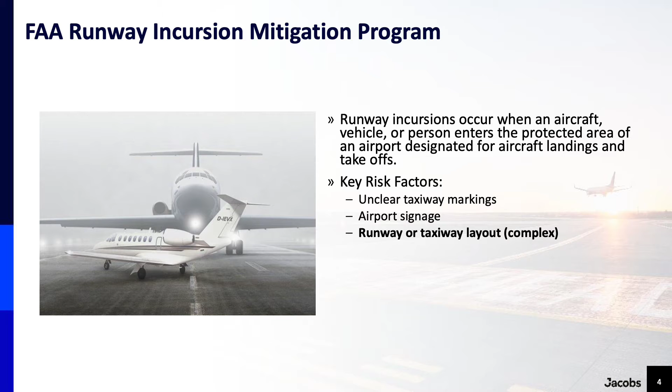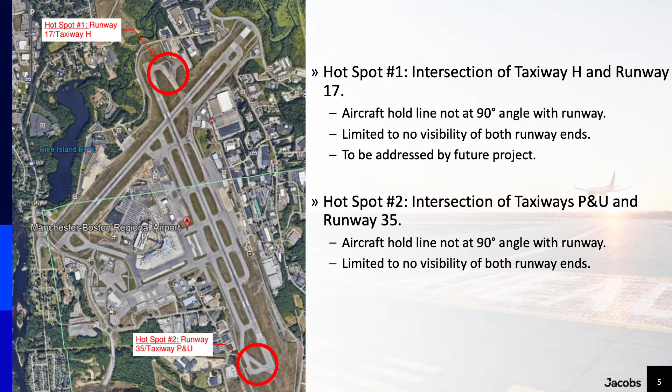There were two hotspots at Manchester that were part of the FAA's inventory. Hotspot number 1 at the intersection of Taxiway Hotel and runway 17, and hotspot number 2 at the intersection of Taxiways Papa and Uniform at runway 35. This project will address hotspot number 2. The issue at hotspot number 2 is that aircraft are unable to hold short of the runway at a 90-degree angle and therefore do not have a clear line of sight in both directions of the runway.

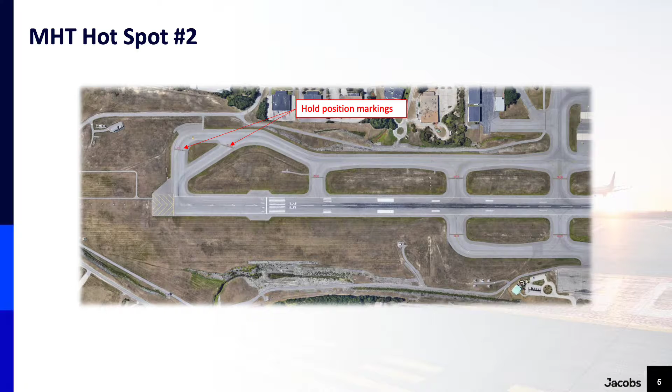In this presentation, I'm going to highlight some of the work items that were involved in mitigating the runway incursion risk at Manchester. So for the primary work items, I'm going to discuss realignment of the taxiways, realignment of the vehicle service road, demolition and reconstruction of the MSE retaining wall, relocation of the high voltage duct bank that runs below the airport, along with some other work items, including reconstruction of the stormwater pond and construction of some infiltration chambers, a closed drainage system, a secondary de-icing pad, and miscellaneous airfield lighting, signage, and markings.

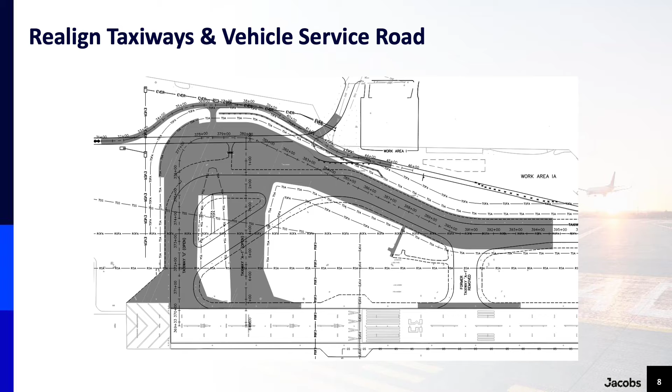Here you can see the final proposed layouts of taxiways Alpha 1 and Alpha 2, along with the new hold position markings. As you can see, taxiway Alpha, which is up on this portion here, has been pushed back away from runway 35, which allows, like I said, the aircraft to come to a stop at the hold position marking at a 90-degree angle to the runway. This configuration also allows for an aircraft that's queuing on Alpha 2 to be safely bypassed by an aircraft taxiing on Alpha up to Alpha 1 on this side.

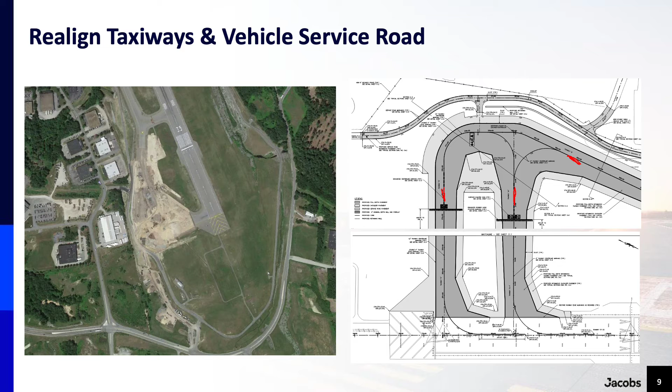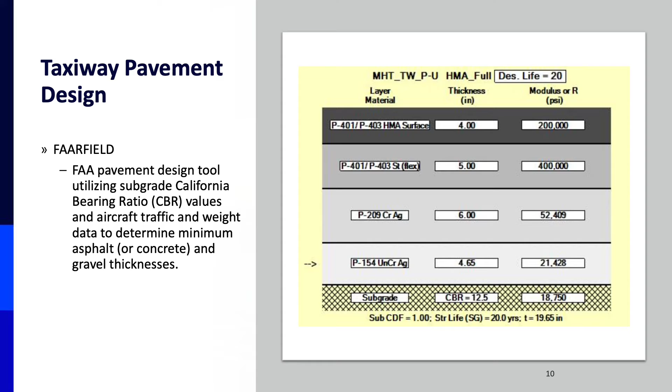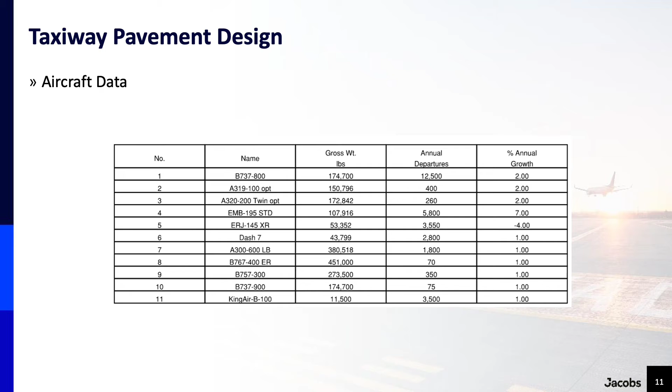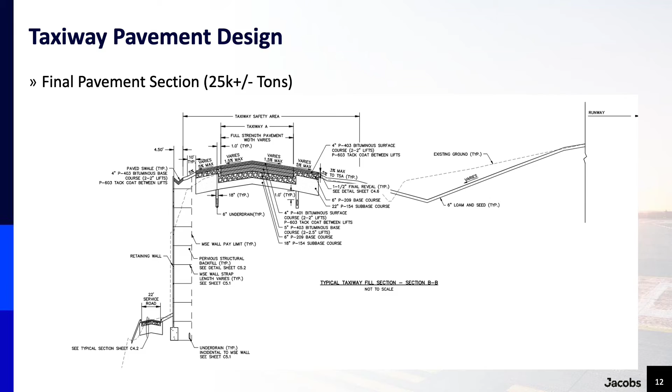So moving on to some of our secondary work items, the airport determined that there was a need for a secondary de-icing location to handle high queue times and peak traffic during inclement weather. Typically the aircraft would be de-iced on the ramp, but with this location being fairly remote from either the cargo ramp or the terminal apron, it's important to have a secondary backup location to de-ice any aircraft that are either held up in a taxi queue or in this case, holding short for extended duration, waiting to be clear for

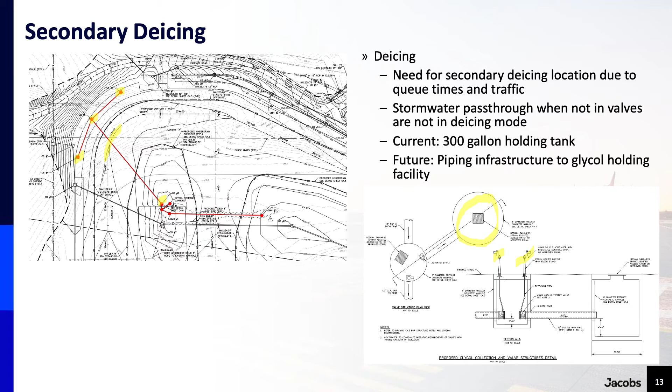takeoff. So what would happen is the aircraft would taxi up taxiway Alpha and stop in this location here and be de-iced. These 3 catch basins on the left side, along with this single basin in the center here, would capture the glycol, and in a de-icing event, the valve would be actuated to allow the glycol into the 300-gallon holding tank, which would then need to be pumped out after the de-icing event. Otherwise, the valves would just be open to allow storm water to flow through into the storm drain.

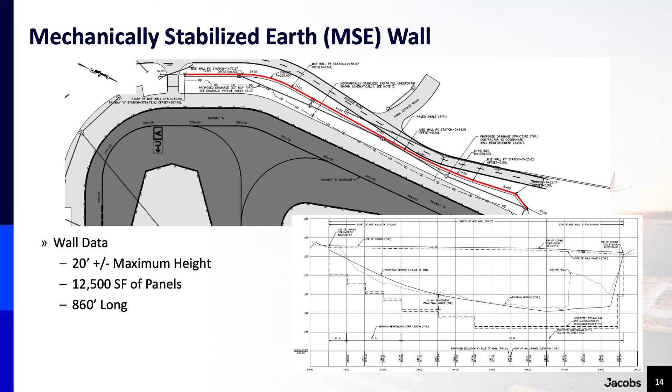On this slide, we have the alignment and profile of the new mechanically stabilized earth, or MSE wall. This wall was constructed to accommodate the realignment of the taxiway and service road. The existing taxiway did have an MSE wall prior to construction that needed to be demolished to accommodate the new taxiway location. Some key statistics on the wall: it's about 20 feet maximum height at its highest point. It consists of 12,500 square feet of MSE wall panels, and it's about 860 feet in length.

And here we have the high voltage duct bank relocation. There was an existing high voltage duct bank running underneath the airport, providing service to Southeast Londonderry. As you can see in the sketch on the left, the existing duct bank runs directly below the proposed taxiway alignment. So that would need to be relocated prior to construction of the new taxiway.

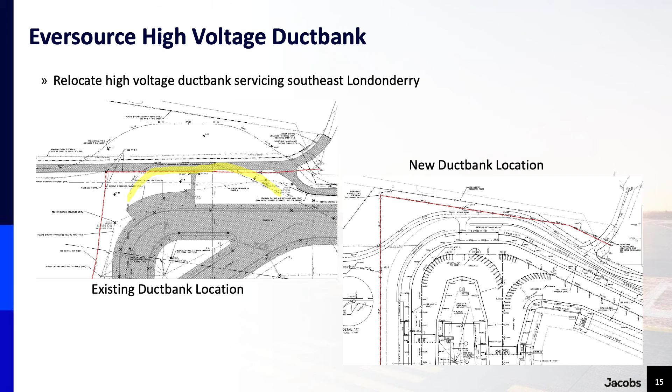As you can probably guess, there was a fair amount of coordination needed to transition power to the new duct bank, since we could not interrupt service during peak heating or cooling seasons. In order to achieve this, a portion of the service road was demolished in the fall of 2018 so that we could cut power over prior to the winter, which allowed us to start the construction of the taxiway right away in the spring of 2019.

The project did require DES alteration of terrain permitting, since it was set to disturb about 1.5 million square feet. In order to handle the increased runoff created by the added impervious area, the existing retention pond, in this area here, was modified to store an additional 110,000 cubic feet of water to reduce peak discharges. We also utilized StormTech chambers as a water quality BMP. You'll see a lot of underground infiltration and detention practices on airports, since the FAA does not allow ponded water to be held for longer than 48 hours. Anything after 48 hours, the FAA considers that to be a wildlife attractant.

And so the StormTech chambers, you can see in the cross section here, the SC-740 chambers we used. There was a total of 210 of those. And that's actually directly adjacent to the pond, so that those chambers will capture the initial runoff prior to bypassing to the pond. And the pond ultimately feeds into the Little Cohas Brook that flows below the airport.

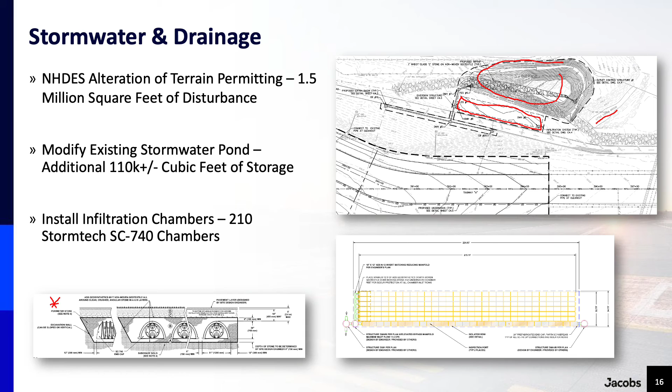And one last thing I wanted to touch on that was somewhat special to this project and airport projects in general, over and above the typical phasing of airport projects that we have to handle, is anytime we're working adjacent to a runway, we have to include contingencies for emergency reopenings of that runway. In our case, we did have an Air Force One landing in August of 2019.

So in order to accommodate that, the contractor spent a couple of weeks regrading the safety areas to get those back up to standard, filling excavations, and in general buttoning up all the work adjacent to the runway so that the runway would be safe for landing. One night in and out, then the contractor returned back to work, a couple more weeks worth of work to undo the temporary work that was done. So a total of 4 to 5 weeks worth of work to accommodate an emergency reopening of the runway.

And here you can see some aerial photographs of the completed project. Taxiway P&U project completed in the fall of 2019, on the bottom of the photo on the left. To the north, there is some follow-on reconstruction of Taxiway Alpha, Taxiway Foxtrot, and the intersection of Taxiway Alpha and Taxiway Echo. Most of that was drainage work and, like I said, taxiway reconstruction, and also taxiway geometry updates to bring those up to the new FAA standard.

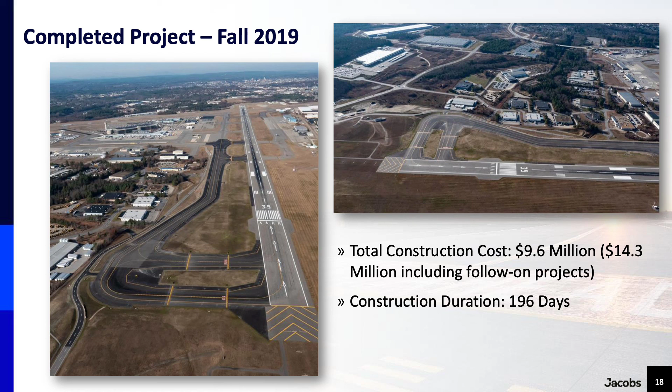I'd like to just take a minute to acknowledge some of the key players that really made this project happen. John Kirkendall of FAA New England, Ted Kitchens, Manchester Airport Director, Tom Malafronte, Manchester Airport Deputy Director, and Carlton Braley, Manchester Airport Assistant Director, along with obviously the guys that made it happen, R.S. Audley, our prime contractor, and Jacobs Engineering Group. We are the engineer of record.